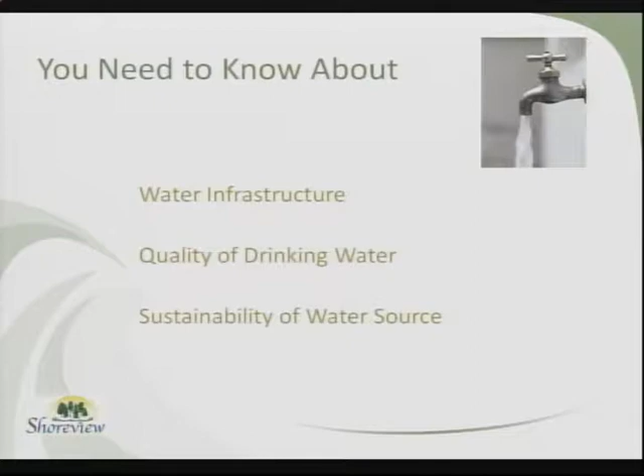I'm going to talk to you a little bit about what the standards for drinking water are that we work with, where those guidelines or standards and laws come from, and what we do to meet them. These topics will move in and out of one another, so I ask that you be patient through the presentation, and I'll stay to answer questions afterwards. But the last topic has to do with the sustainability of the water source.

It's almost criminal to me that there isn't more public discussion about drinking water. We tend to only talk about it publicly when the media jumps on it, when there's a problem or a crisis. But if you think of all the other things we assume are happening in this state, economic development, job creation, business retention, all those things presume there's a safe drinking water source. Without a safe drinking water source, none of that happens. I'm in an industry of people who commiserate and lament that most people don't think enough about this, so I applaud you for being here and showing interest in this topic.

So this is who we are. For those of you who don't know, Shoreview, Minnesota is approximately 27,000 people. It's an odd-shaped city, and as you can see on this map, there's a lot of water both in Shoreview and the surrounding area. Water topics are a big deal in this market, and they have been forever in Shoreview. None of that water you're looking at, however, is part of your drinking water supply, at least not directly. We'll be talking about our drinking water source a little bit later.

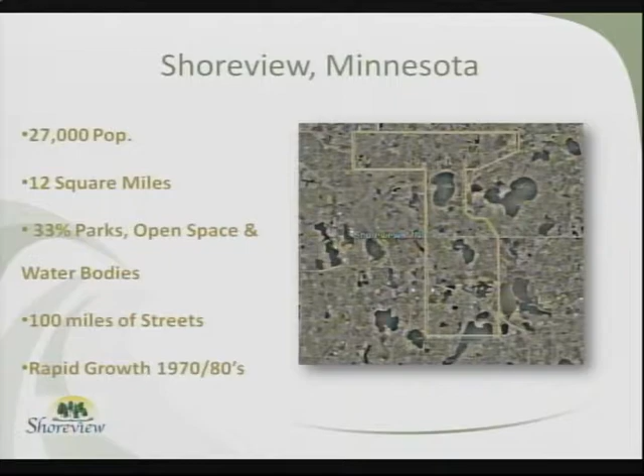Some other engineering geek metrics: we have 100 miles of streets under Shoreview's jurisdiction, and there are public water supply pipes under almost every one of those 100 miles of streets. One takeaway you'll have from this community is that there was a rapid period of growth in Shoreview in the 1970s and 1980s, and that date stamps a lot of our infrastructure. A lot of the public infrastructure for the city of Shoreview was born out of that era, reflecting the construction types, material types, and the thought process in place in the 70s and 80s.

That was obviously a long time ago, in some cases 40-plus years ago. As we continue to preserve and enhance these services, we're building on things that were built in some cases 40 or 50 years ago. The city of Shoreview's status as a public water supplier is having its 50th anniversary this year, so we are not new to the drinking water business—we've been a public drinking water provider for 50 years.

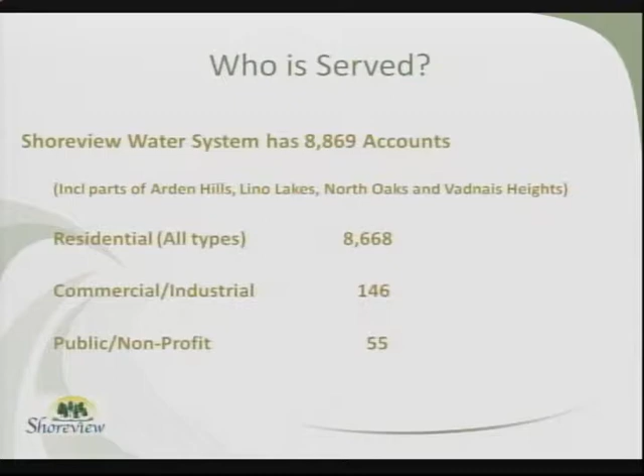Our public water system in Shoreview serves a little over, close to 8,900 accounts. What some people don't realize is that the city's public water supply also serves parts of Arden Hills, Lino Lakes, North Oaks, and Vadnais Heights—not large parts, but areas along the edges where it's not cost effective or even possible to have their own public water supply. In the case of North Oaks, they don't have a public water supply at all; any public water they use is provided by Shoreview along the Highway 49 boundary. Most of our accounts, the overwhelming majority, are residential water accounts—just John Q. Public house, townhouse, residential accounts. We also have about 150 commercial industrial accounts and 55 accounts we classify as public or nonprofit.

Back to that 100 miles of streets, we have about 100 miles of water mains. We have 2 elevated towers, a buried reservoir, 6 deep production wells, and you may have heard we just recently completed our water treatment plant. Those are the big parts of our water system. What's not listed here is the 1,000 or so hydrants, gate valves, and other smaller pieces of infrastructure necessary to operate this giant system underneath the ground that you never even see.

I included a picture for those of you with keen eyes—you may notice this picture in the lower right-hand corner is underneath the railroad and pedestrian bridge alongside 694 near Sioux Street and Cardigan Road. If you remember, on Mother's Day 4 or 5 years ago, we had a water main break. This is one of the largest water mains in the city of Shoreview—a concrete pipe, I believe 24 inches or 16 inches in diameter, and it blew apart right next to the freeway.

This is the reality of maintaining infrastructure that's 40 to 50 years old—you have to be able to respond to these sorts of things. That shut down water for a small part of our city for about half a day. If you can imagine, we fixed that on Mother's Day, which was a Sunday, and it was actually washing debris out onto the freeway.

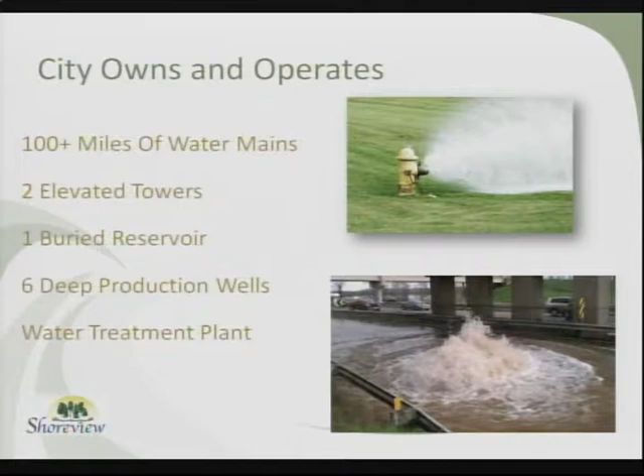So what I'm showing you right now is where our water comes from. A lot of you probably already realize that our drinking water in the city of Shoreview comes from groundwater. We produce our own drinking water—we do not buy it wholesale, and it's not piped to us from some other provider. We produce our own drinking water.

We have access to the Jordan Aquifer, and our deep wells are in the Jordan Aquifer. What I'm attempting to show you in the upper left-hand corner, that map shows the extent of the Jordan Aquifer in North America. The blue part is buried, and the green part is actually at or near the surface and is essentially unusable, or lower quality, for drinking water. The blue part is typically what's used for drinking water. We are right in that little piece of blue.

We're in an island of the Jordan Aquifer where it's available and drinking water is plentiful and relatively inexpensive to obtain. It's a big reason why the majority of cities outside of Minneapolis and St. Paul use that water source—it's relatively easy to get to, and it's a great water source. But you don't have to go too far to the north, east, or south before it's no longer an option for your drinking water.

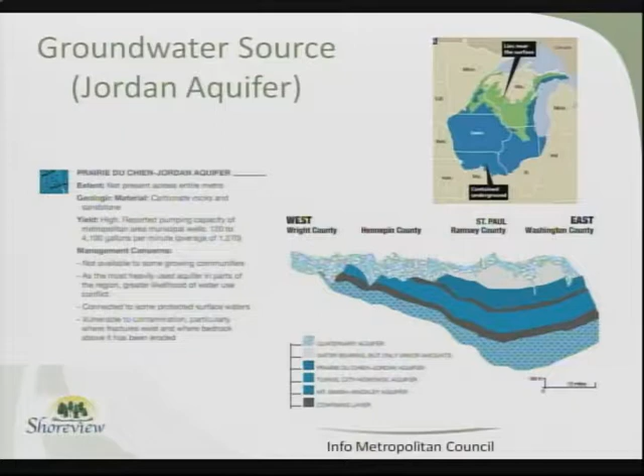I don't believe the DNR and the Department of Health are even allowing wells to be drilled into those layers anymore. The notes here are about the Jordan Aquifer, which compared to other aquifers is considered a very high-yielding aquifer. It's why people want to get their drinking water from it, and it's also very high-quality drinking water.

We'll get into the treatment talk a little bit, but until recently the city of Shoreview has not had any need to do anything to the water taken from the Jordan Aquifer other than what's required by law for chlorine and fluoride. That keeps water rates low, since the cost of producing water is relatively low from the Jordan Aquifer.

It is, however, somewhat vulnerable to contamination, as that aquifer comes near the surface and there are fractures in the geology. Knowing that subsurface geology is really important, and knowing about contamination sources and how they may move through these aquifers is actually very important.

If you've been listening to the news, NPR, or reading documents, there are a number of nonprofit organizations voicing concerns about water. This is sort of a revelation in Minnesota to some people - we're the land of 10 or 11,000 lakes, and we have more water, especially right now. If you live near Grass Lake, you're probably sick of water. So it's difficult for some people to get their head around the fact that there might be water issues, and it isn't just the Twin Cities metro area.

We can't just blame people living on White Bear Lake for sounding an alarm about water levels. According to the DNR, there are water topics all over the state of Minnesota. Some have to do with drawing down aquifers to a level that begins to impact surface water features like trout streams, lakes, fens, or wetlands. In some cases it has to do with agricultural wells fighting one another because they're too close together and too high production. So there are groundwater topics all over the state of Minnesota, not just in the Northeast metro area of the Twin Cities.

I wanted to call attention to these graphs and exhibits from the Freshwater Society, the director of which was your speaker last month - I borrowed these from his materials. This top graph shows that in the West Metro, there's been a 60-year trend of decreasing aquifer levels. That means the pumping and taking of water from that aquifer in the West Metro has caused this long-term decline in the availability of water deep underground. That's the story in the West Metro.

This graph, showing a subtle but statistically significant increase or rebound in groundwater level, is actually from the city of Shoreview. This is important because there's been a lot of discussion in this marketplace about the possible impact of drinking water providers on White Bear Lake, to the point of naming cities in lawsuits. That does not agree with the premise that the city of Shoreview is sucking the lake dry anywhere. The groundwater levels are rebounding in this area and are actually at a historic high right now. So, not to pick fights or debate those points, the discussion about groundwater availability needs to be specific - it can't just be a blanket statement.

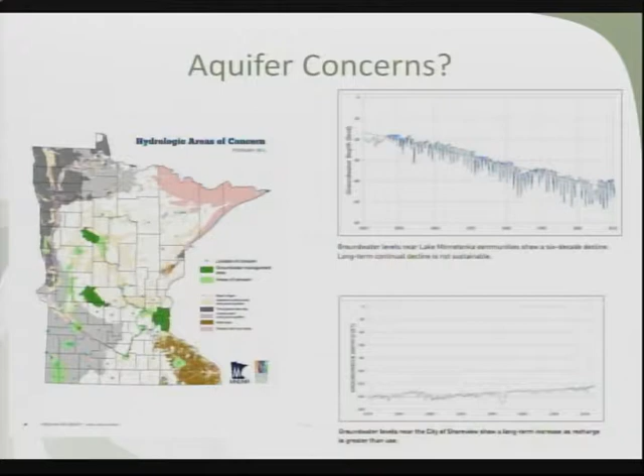There are some parts of the Twin Cities metro area that do have an acute issue, or are about to have an acute issue, with groundwater. Shoreview is just not one of them right now.

So I mentioned these wells - you may recognize these little buildings, sometimes brick, sometimes with a block finish. There's one right in the corner of the parking lot out here, and a lot of people don't realize that. We have 6 of these deep drinking water production wells in Shoreview, all built between 1969 and 1987. The city hasn't added any water infrastructure specifically to increase production or demand since 1987 - we've been living with that level of infrastructure since then and we're quite comfortable with it. Those wells average about 450 feet in depth.

That aquifer, that layer we call the Jordan Aquifer, to get to the part of it in this area that's water bearing, we need to get down around 450 feet. Each one of those wells produces about 1,500 gallons per minute when they're ramped up and running at full speed. There are very, very few times during the pumping season where all those wells are operating simultaneously.

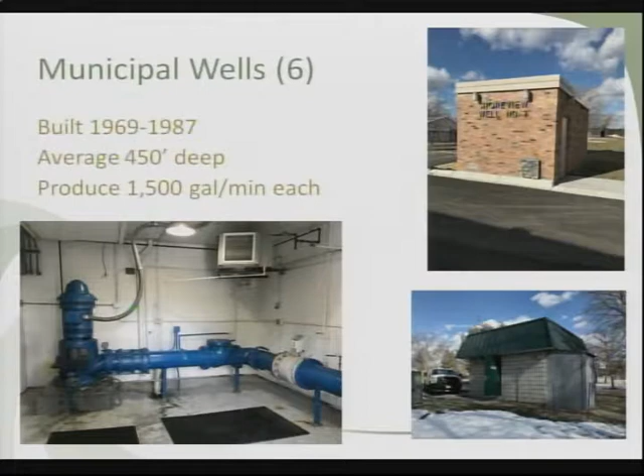What happens is we cycle them. For instance, right now, during this typically low water production period, one or maybe 2 of those wells can satisfy the city's demand. All 6 would be going only on the hottest summer day, when everyone's watering like mad, we'd probably need all 6 of them.

Those wells pump the water - before we built the water treatment plant, the water system in Shoreview was designed for all those wells, which are scattered mostly just around the community center area, to pump to a buried reservoir that's over behind the ice arena. If you look at Google Maps or an aerial photograph, you'll see a very faint outline of a big circle - that's the outline of the buried reservoir behind the ice arena. So all of our wells were designed to pump to that reservoir.

And then what's in this photograph are these 4 very large pumps. We call them booster pumps. They're about 4 or 5 feet tall, enormous pumps, and their purpose is to pump the water out of that reservoir and send it out into the system, out to the water towers.

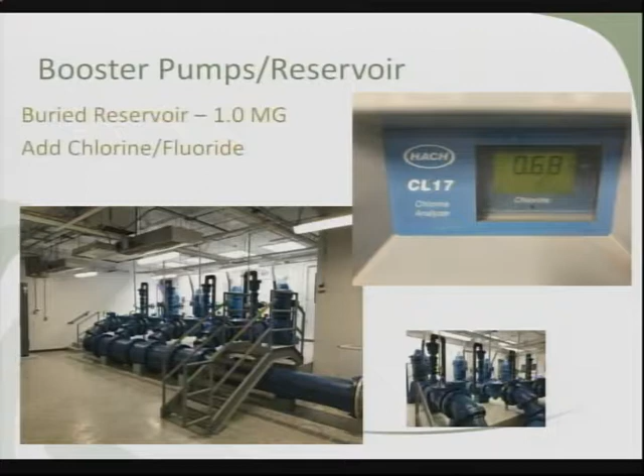This is where the chlorine and fluoride were added to the city's water supply, and it's all monitored with very expensive precision equipment.

I mentioned the water towers. So it goes from the booster station, gets pumped out in the system, and goes out to the water towers. I've got various photos here - we have 2 water towers, and each holds 1.5 million gallons. Then there's a buried reservoir that holds 1 million. So we have 4 million gallons of storage.

Just for fun, I included these 3 photographs of the North Water Tower. Does anyone remember when it looked like this, with the old logo on it? Well, then we hired a contractor and painted it, and this shroud was to contain the paint because it's sandblasted off and then collected. So this is kind of the sequence it takes to rehab a water tower.

You can see what it looks like today. Up in the upper right-hand corner of this slide is the water tower down by County Road E and Victoria Street. That one was repainted a couple years later, which is why it's got the new city logo on it. The North Tower, up by Lexington Avenue, was actually painted right before the city adopted a new logo. We somehow - I don't remember exactly the process - came up with this style of lettering, and that became the lettering for the new logo. So there's some connection between the 2 towers.

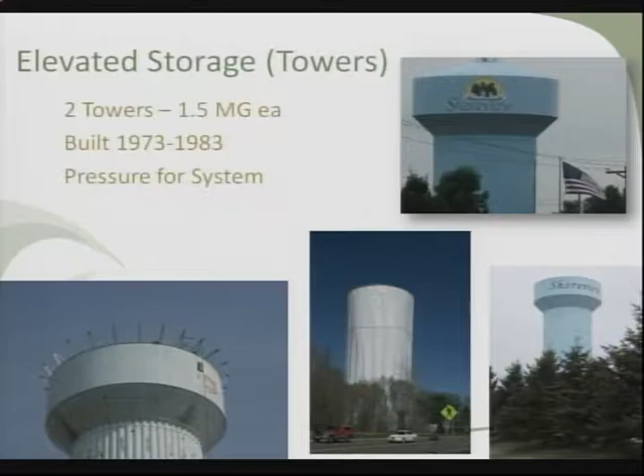These water towers are made of steel and coated with paint. Like anything steel with paint on it, it breaks down and needs to be repainted. Each of these towers has been recoated at least once before, and I think they're both coming up to be recoated again in the next few years. It costs about $750,000 to recoat the inside and outside of a water tower.

So this is what I was trying to explain before - the wells went to the reservoir, and then the booster station pumped it out to the water towers. We have one outlier well up by Turtle Lake, out in Turtle Lake Park across the street from Chippewa Middle School. That city well was doing its own thing, pumping into the system. We were adding chlorine and fluoride at that well, and then it was pumping into the system.

And the characteristic of that well was it was a very high production well, but it also had, I believe, the highest iron content of any of our wells. So if we ran that well all by itself, people noticed iron in the water. Even when we blended it with other wells, it was still contributing a lot of iron. Iron is not a health issue, as you know, it's an aesthetic issue.

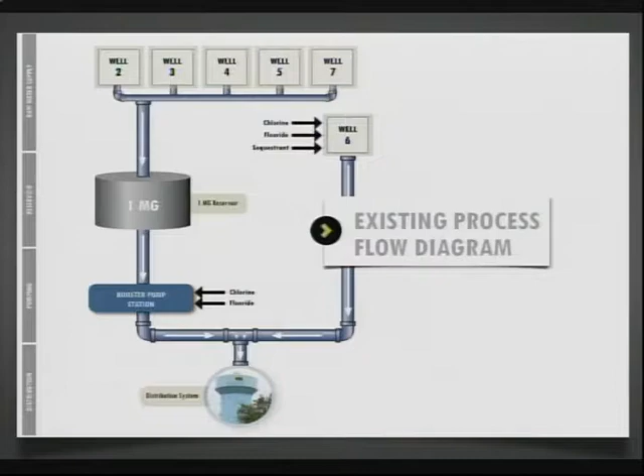So if our water was so great, why did we need to build a treatment plant? Somebody asked me that once.

Well, for 50 years we've been monitoring the levels of iron and manganese in the water. These are very common elements in groundwater, very prevalent in the Jordan Aquifer. Over the years we'd been noticing and tracking increases in complaints about rust and staining. You notice operational things when you go out to turn valves and open and close hydrants, all that metal, the iron and manganese accumulating in those things. It shortens the service life of these things, and it's really not a surprise.

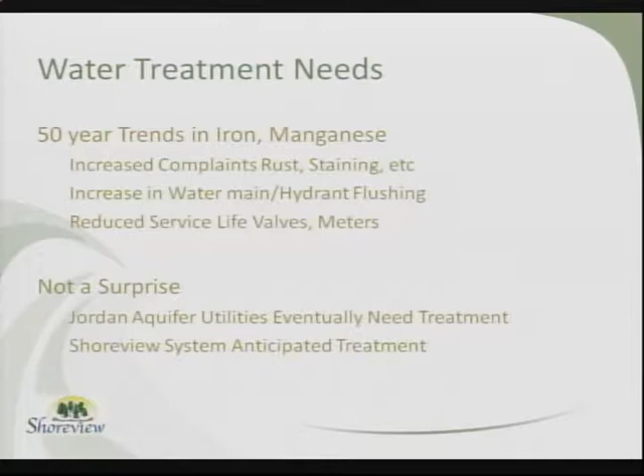Most of the public water suppliers in this area drawing water from the Jordan Aquifer are either currently treating or budgeting for a future treatment plant. Again, it's for iron and manganese.

So the city had actually been anticipating building a water treatment plant all the way back to the 1970s. That's why the wells were all put in kind of one area and pumped and directed to the same area. That put us in a position we leveraged greatly with the design of the new water treatment plant. It's a lot easier to treat your water when it's all pointed at one place rather than having it going all over.

So as you know, we built a water treatment plant. That project was completed and went online right around November 1st of last year. Its purpose is to treat for iron and manganese, that's all it does. It has some capacity to be a platform for other types of treatment if they were ever necessary, but we don't have anything cooking, there are no signals or signs of anything else that would ever need to be treated for here.

But this is a 50 to 60 to 100 year life cycle piece of infrastructure, and so you'd build in as much capability as you could, knowing that. It can treat 8 million gallons a day.

Right now the city's using about 1.6 million gallons this period, in the winter. An average day for the city of Shoreview is about 3 or 3.5 million gallons. The highest ever recorded in city history was 11 million gallons, that was before we had sprinkling restrictions, and we do business a little differently these days. In the last 10 years we haven't had a day that exceeded 6 million gallons. So 8 seemed, after careful analysis, to be the right capacity, the right size for a water treatment plant for the city of Shoreview.

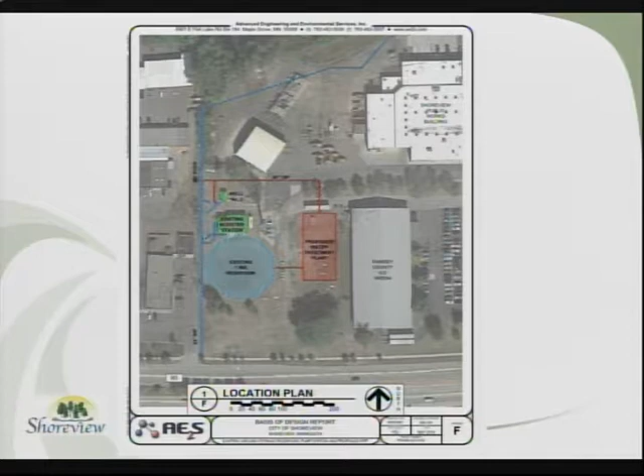One directive from our city council was to make this building look like it belongs here. And it looks a lot like the other buildings in this Commons area campus. I'm really proud of this city for thinking like that - make things look like they belong here. It's not some odd looking structure, and it's not that big of a price difference to do it right like this.

So this is kind of what's going on now. All these wells, including the one up by Turtle Lake, now all come together and are treated at one point. There's nothing being pumped into the system separately. All drinking water for the city of Shoreview comes through that building over there behind the ice arena. It's all treated in one place, it's monitored, it's all exactly the same coming through that treatment plant. And then it goes to that booster station, which is still there, that buried reservoir and booster station, and then it's sent out into the system.

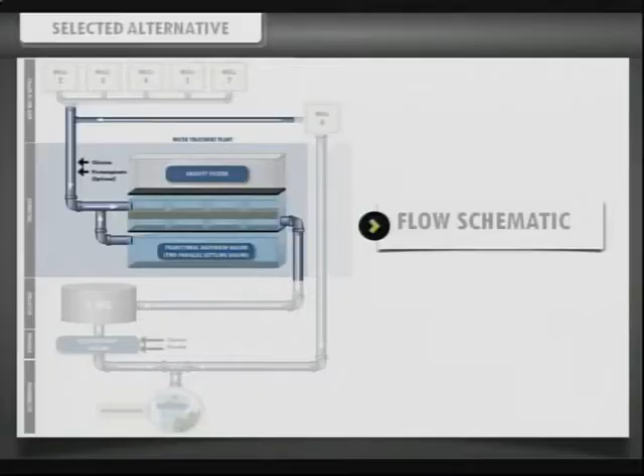So the water treatment plant just kind of came between these pieces of infrastructure that were already there.

This is a fun topic right now - this acronym SCADA, you might be reading or hearing about it. Short version of supervisory control and data acquisition. A real generic way to think of it is it's sort of the master controller program - software that coordinates the operation, the security, and all the communication for all this water infrastructure.

That last line of text I added in the last couple of days to this presentation because this is particularly relevant based on some news lately - that even with all this technology and even with phone apps that can tell me the tower levels and all the stuff we have that we can leverage, the city of Shoreview has and always will have 24/7 human interaction with these things.

So, for example, one version of the story I heard about one of the incidents in Blaine was that the software running the water infrastructure was noticing the water towers weren't at the right levels and was trying to communicate to people. There was some break in the link of communication, and because they were relying apparently completely on that link, no one knew that the system was telling them something was wrong. That's one very simplified version of the story.

What's different here in Shoreview is that we have someone every day physically in contact with this critical infrastructure. Nobody goes home for the weekend and we learn about it Monday morning. There's somebody here Saturday, there's someone here Sunday. Both of these incidents in Blaine, I believe, happened on a Sunday.

These photographs in the lower left show a cabinet you can't really appreciate until you come on your tour of the water treatment plant. It's about 7 feet high and 12 feet wide, and the stuff in that cabinet is probably worth millions of dollars. That's the brains behind the flat panel monitor screen that shows the schematic of all these things.

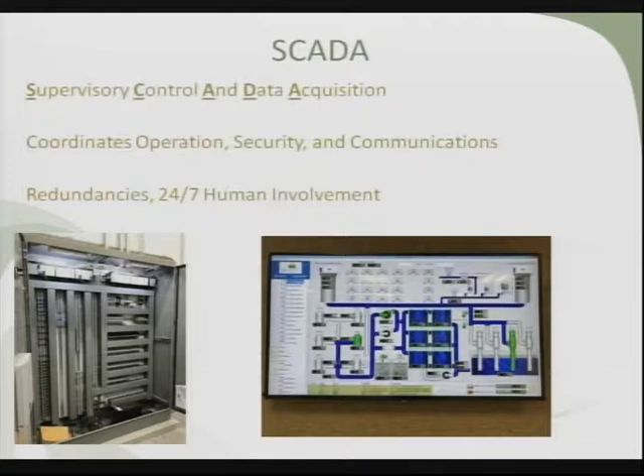This really busy computer screen is a diagram showing all these critical pieces of infrastructure: the water towers, the wells, the booster station, the level of water in the water towers. All those things are coordinated in that software, and all that data is collected through this immense cabinet of hardware. If you're able to tour the plant, you'll appreciate how things can go wrong. It's all mechanical, it's all electrical, and it still isn't infallible.

So do we get to produce drinking water any way we want? Do we get to flavor it? Do we get to pick the standards? The answer is no.

There is very clear federal law called the Safe Drinking Water Act that tells us exactly what the targets are for safe drinking water, what the limits are for compounds, elements, and contaminations. It sets a national standard that does not vary by state or region. So California, Minnesota, New York, Florida — we're all operating under the same federal law, created by Congress in 1974, and amended in '86 and '96.

It essentially looks at things in drinking water as primary standards and secondary standards. Primary standards are for things that would be health problems, carcinogenic, anything like that. Secondary standards are suggestions for things that are not health related, but are things you would notice.

Iron, manganese — any of you ever had a private well, drinking water out of a private well? So you know you can see things in water, you can see minerals. One way to think of why iron and manganese aren't considered primary contaminants is if you take a multivitamin, those things are in it — they're necessary for human life, so they're not bad things. They just cause other issues in the system, considered aesthetic issues, taste, odor, but not health issues.

Shoreview's water treatment plant was built to respond to secondary contaminants, not primary health-related contaminants. All of the detail for this, I encourage you to check out through Shoreview's website. The City of Shoreview is required by law, like all public water suppliers in the United States, to produce an annual consumer confidence report, or drinking water report, made available to every single one of our water customers.

That is actually testing data that's not compiled by the city — it's compiled by the Minnesota Department of Health. So this isn't the city's version of our drinking water; it's the objective regulatory agency's version of the status of our drinking water. Every year that I've worked here in Shoreview, we meet or exceed every single standard with our drinking water.

This is my alphabet soup slide, just some ideas of who regulates drinking water. The Safe Drinking Water Act was created by the U.S. Congress, and the Environmental Protection Agency has general responsibility for oversight of the Safe Drinking Water Act.

In Minnesota, drinking water is directly or indirectly regulated by the Minnesota Department of Health, the Minnesota Department of Natural Resources, the Minnesota Pollution Control Agency, and the Board of Water and Soil Resources, which actually has some statutory or rulemaking authority in the realm of drinking water. At the regional, city, or local level, you have cities, watershed districts, and soil and water conservation districts — all with some role to play in drinking water or the protection of water in the state of Minnesota.

One thing we're required to do as a public water supplier, in a program overseen by the Minnesota Department of Health, is produce a wellhead protection plan. I'll help you out here. These white rectangles with writing in them are the wells, the City of Shoreview wells. This one off by itself is the one up by Turtle Lake. And these are the ones right around where you're seated now. We're sitting right in the middle here.

What this is showing is that the direction, or drift, of groundwater in this area is from northeast to southwest. The water moves through this aquifer underneath us, 450 feet down. It's moving from up here, up by Taylor's Falls or Forest Lake, and it goes all this way till it hits the river, and we kind of intercept it on its way.

The colors on this map are what the Department of Health considers to be the vulnerability of the aquifer. Those red areas are modeled to be highly vulnerable areas, vulnerable to contamination, vulnerable to something other than good water being there.

This is North Oaks. So this line drawn around here is an area called the DWSMA, the drinking water supply management area. This is an area of particular interest to the City of Shoreview because things that go on in that area could potentially have an impact on our public water supply.

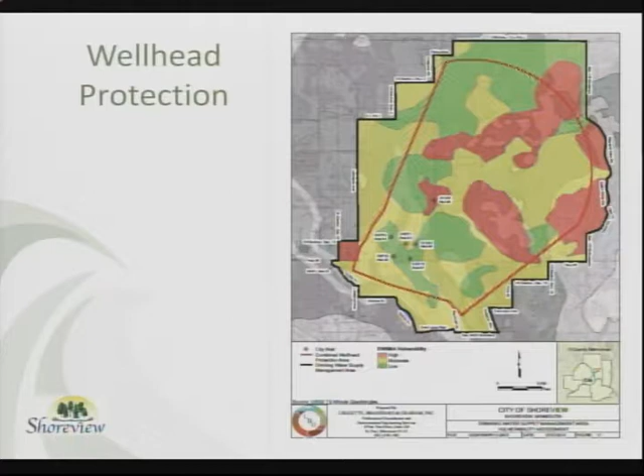And it shows you how complicated drinking water gets. Most of the issues, most of the potential issues for us, aren't even in our city. So you start to think of cities kind of as a mosaic in the metro area, all with these little lines that overlap one another, and decisions made in one community should be of interest to people in another community.

What makes those red areas a higher risk? Fractures in the geology or soil types, the ability for water or things to move downward through the soil to get to that bedrock layer. Those are the sorts of things that are considered. The question had to do with what made those areas considered to be more vulnerable, and they're based on surveys of soil types and geology in the area. It's an art as much as it is a science.

We obviously care a lot about what goes on at TCAAP. TCAAP is right next to Shoreview. There have been drums and drums and drums of printing ink that have been spilled about contamination at TCAAP. It is not an uncommon question here at Shoreview City Hall, especially from new residents or people thinking of moving here. They want to know, hey, what's going on with your water? We hear that right next to you is a Superfund site, a cleanup site.

So what I've got here, this red square is the Twin Cities Army Ammunition Plant site in Arden Hills. Just to give a reference point, this is Turtle Lake, and this straight line going up and down is Lexington Avenue.

So what this map is showing you is that the contamination plume in the groundwater from TCAAP, from all those decades of whatever was going on out there, is very well known and tracked, and it's moved south and west of this area. Remember that slide where I said the gradient, the direction of groundwater flow in this area, is from northeast to southwest. That's great news for us, because this contamination plume doesn't move towards us, it moves away from us.

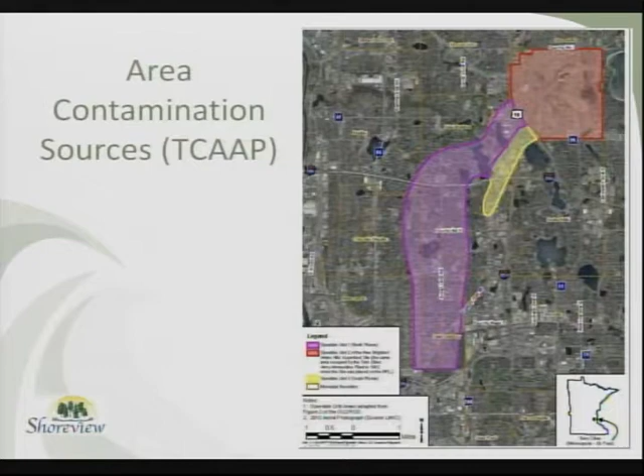And there is a perimeter of deep aquifer and shallow aquifer wells that go right around this site, and there's never been anything that's hit that perimeter. It all goes to the west and it all goes to the south. It's just a common question when people want to ask about drinking water in Shoreview - our neighbor to the west has got a Superfund site, so it's a logical question. Everything that's been tracked and noted since the 1980s has not detected one bit of contamination from that land use on our water system.

So, kind of figured we'd talk about Flint. I will do my best to not editorialize. There is amazing amounts of information, public information, available to you about what happened in Flint, and I'll give you my version of it as a public water provider.

That city got, like some cities in Michigan, into serious financial problems. The state, as part of their emergency management approach to solving a budget crisis, put directors in decision-making capacity for the city of Flint. And a decision was made to change the source of their drinking water to the Flint River.

The Flint River was known to be different water quality than their existing past water system. It was known to be more corrosive. And it was known that to provide the same level of drinking water as residents had before, they would need to do some treatment. Decisions were made in that process to not do that treatment.

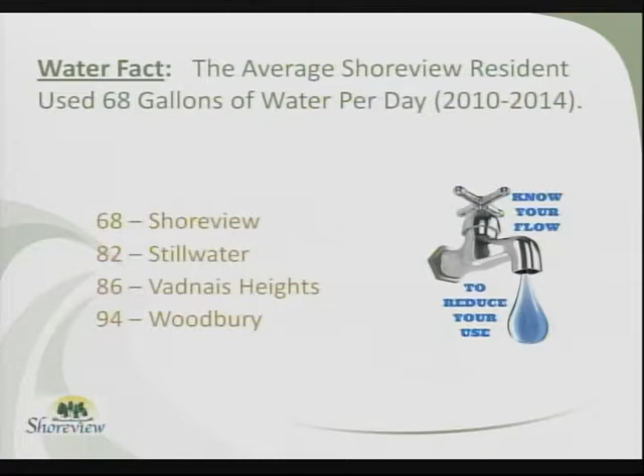Okay, we're at 68. We're already beating the DNR's goal for water consumption in this region. Those other numbers aren't there to shame anyone, they're just there to show you who our peer group is. There's a lot of reasons for different consumption rates in different cities. In the city of St. Paul, if you own a house there, that number is down around 45 or 50 because the lots are smaller and a lot of people don't irrigate. So that number understandably has a lot of variation in it. But in that time period of 2010 to 2014, we were at 68, and I believe we're lower since then.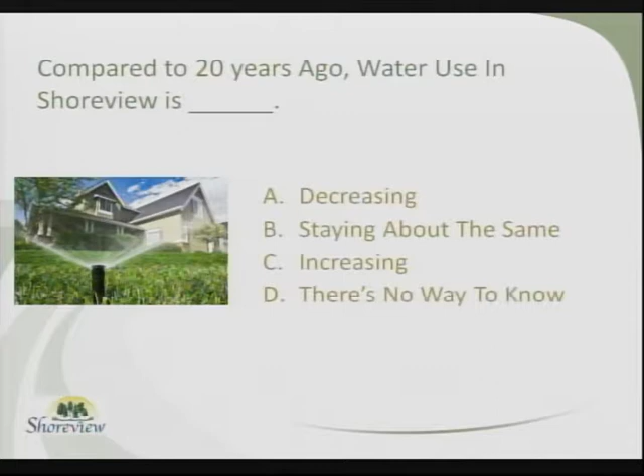You might already have figured this one out, but compared to 20 years ago, water use in Shoreview—now consider, we've added customers, there's been new housing in the last 20 years, there's been growth in our economic base, and we've even added pieces of other cities in. So with all that in mind, we are actually producing less drinking water. Water use in Shoreview is trending downward. We're already below the target the DNR has established for water consumption for this area, but we're not done, we're continuing to work on this. I have 2 more years of data that I'll soon be adding to this graph, and that line keeps going lower.

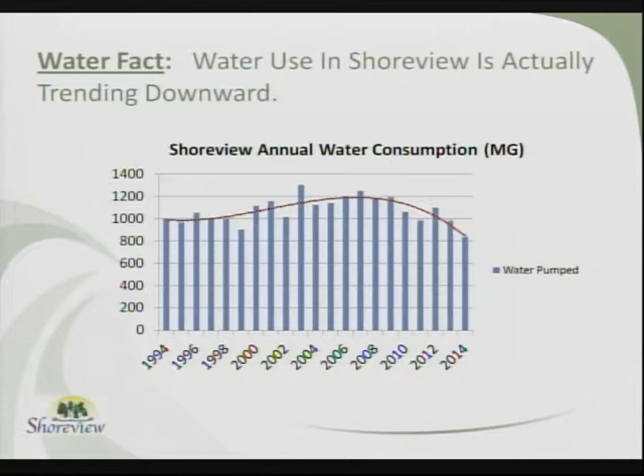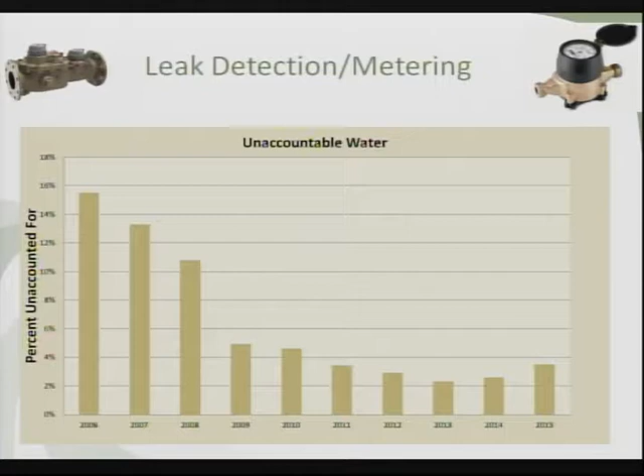You may recall, if you've lived in the city for a number of years, that in 2009 we changed out all the water meters in the city. That's because as water meters get old, they under-record the water use. So we've done quite a bit here—leak detection as well.

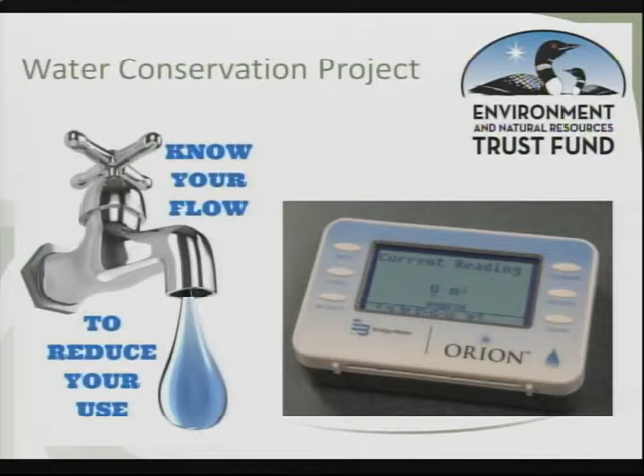You may also know that the city of Shoreview received a state grant for a project called Know Your Flow. The premise of this project, the big fuzzy question, was: if people had better information about their water consumption, would it change their behavior? At the point we wrote this grant, most people relied on their water bill, which comes every quarter. It could be months since you used a lot of water, and you're looking at your bill trying to make heads or tails of it, saying why is my bill so high, I don't remember using this water. So the premise of this project was, if we put people in touch with their water consumption, shorten the time period—or maybe even real time—give them tools to look at their water consumption, would it change their behavior?

And I sold that idea down at the legislature and to the board that funded these projects, and I wish I'd have been asking for more money, because this was so warmly received. People said, wow, what a great thing.

Rather than esoteric studies or academic exercises, here's a city that's really trying to connect the dots and put their customers in a position of making meaningful changes to their behavior.

So that grant project launched. Is there anybody in the room here that's part of that? Okay, all right, preaching to the choir, as my mother would say.

So this program was going to simply be: if we gave you a device that could show you your water consumption a little closer to the time it happened, would it help you with your behavior?

Right as we were launching this project, we learned about another tool called WaterSmart. Is anybody here active in WaterSmart? We have about 1,100 people in the city that are currently getting these water use reports and using the web portal to see very...

...shortened time period between their meter reads. We now read your meter monthly in Shoreview. We used to read it quarterly, and it could get to be a real long period of time between your meter read and your behavior and your bill. Again, who can remember what faucet you had on three months ago?

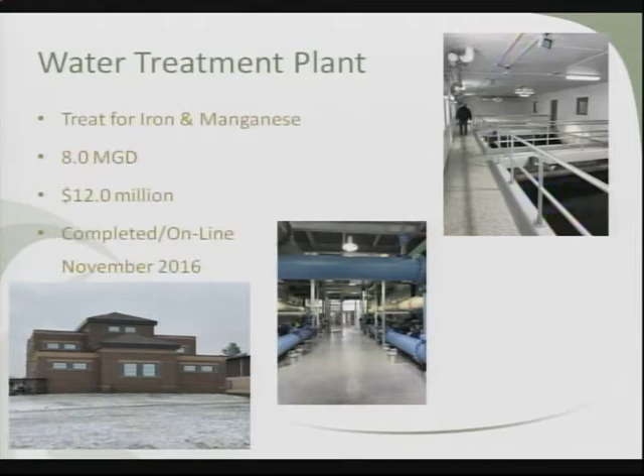We hit it with chlorine before that process to start a process called flocculation, which causes the particles to get big so they're more easily flushed out. Every so often, the sand filters need to be backwashed to clean all that stuff out. The backwash goes to tanks underneath the water treatment plant and is allowed to settle. We run the water back through the water treatment plant, and what accumulates in the bottom is kind of a sludge. It looks like a black sludge, really just iron and manganese and a small amount of water. This water treatment plant's backwashing process was designed to be ultra water efficient—there's very, very little water wasted in this process.

Okay, there's one more step there. What happens to the sludge? The sludge is mixed with a little bit of water and it's actually put in the sanitary sewer system. It goes in the sanitary sewer system, gets diluted with all the other sewage, and ends up down at the treatment plant in St. Paul.